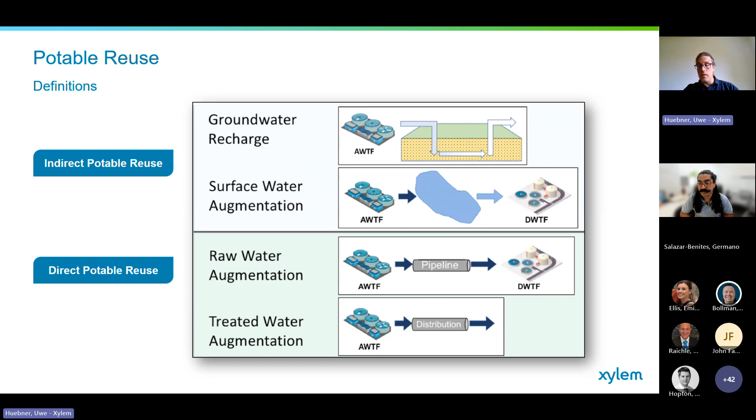The alternative option would be direct potable reuse, and that is where we would go directly after the advanced treatment, either into the drinking water treatment facility or even directly into the distribution system. So typically a part stream. And the main challenge here, of course, is that we don't have any response time anymore to really respond to failures and problems in direct potable reuse.

Okay, when it comes to potable reuse, of course, we need to make sure that we completely mitigate any health risk related to contaminants from the wastewater. And there are different frameworks how advanced treatment can be described. I like this from a presentation from the people from Trussell Technologies a while ago. They call it the 4 R's.

So the advanced treatment needs to be redundant. That means, first of all, we need to have redundant treatment regarding if a treatment is failing, that we still can supply the water. But it also means that especially for pathogens, we need redundant processes. So we don't want to rely on only one disinfection barrier, for example.

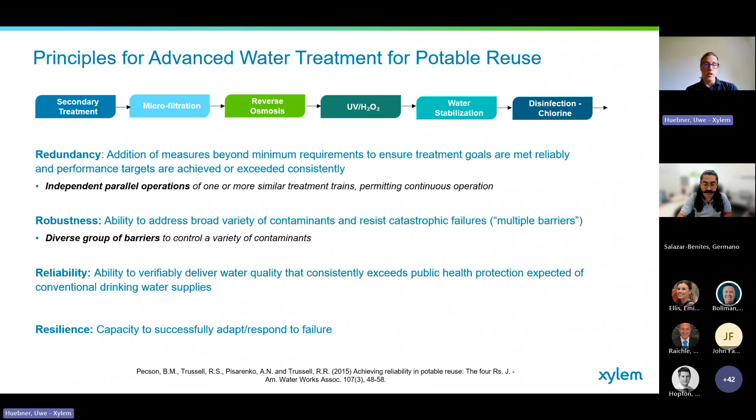The treatment needs to be robust, which especially refers to we want to have different types of barriers so that we can really address and control all different types of contaminants, especially chemicals. Of course, treatment needs to be reliable. So we're talking about potable reuse, acute health risk. So 24/7 treatment, and it all needs to work, of course, all the time. And the treatment train needs to be resilient to adapt, to respond to failures.

Okay, so with that said, there are a lot of different options how you can design a treatment train. In the recent past, there are two major concepts, I would say, that are dominating. And one is the RO-based concept. That's often also referred to as fully advanced treatment or the golden standard of California. So it's a membrane filtration followed by reverse osmosis, and then we have a final UV advanced oxidation step.

Alternative concepts are often referred to as carbon-based advanced treatment. We will hear more about this also from Germano today after my presentation. The major barrier here is ozone, followed by a biological activated carbon filtration, and then a GAC. This is often combined with additional treatment like UV disinfection or alternative barriers for some specific chemicals that are occurring.

So the carbon-based advanced treatment has the advantage that it comes at lower operational costs. And especially when we're talking about inland facilities, we don't have the brine, the concentrate produced from RO, which is a real management and treatment issue. But of course, apart from the better treatment, the more advanced treatment with the RO-based, we also have other potential advantages regarding the byproduct formation, which may be an issue with ozone, especially when we have high bromide levels. And of course, also, we often have higher salinity in our treated wastewater that we might even need a step to reduce the salinity.

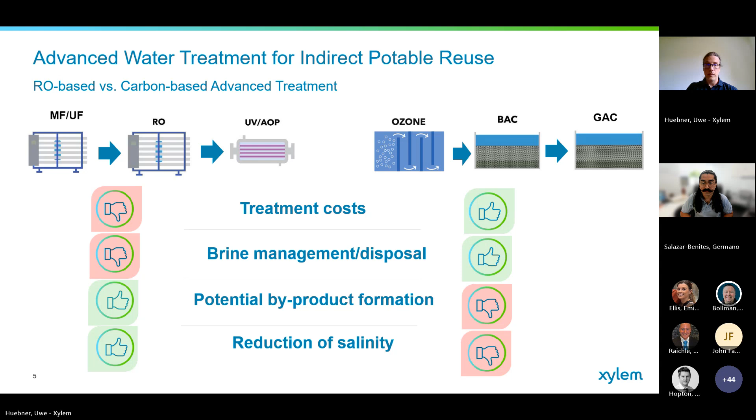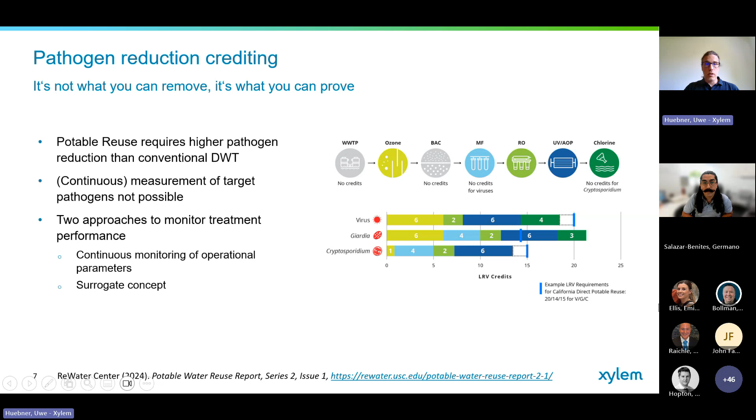And the other alternative is using surrogates. The surrogate parameter would be a parameter that is removed by the process, and that we can continuously measure to confirm the removal. Okay, I'm gonna go into 2 examples right now. Since I'm working for Wedeco Xylem, I'm focusing on UV-based and ozone-based treatment.

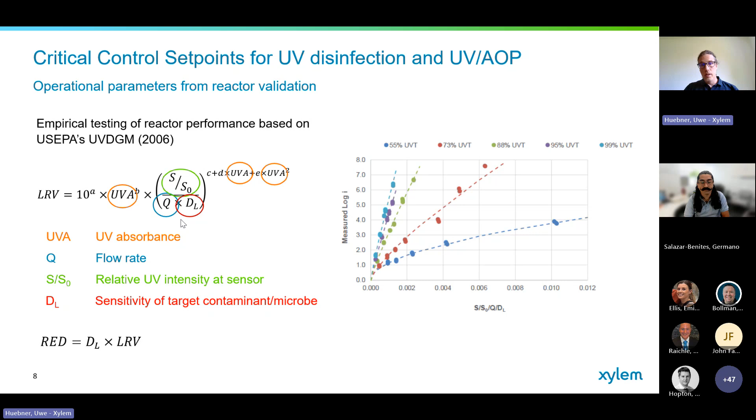For UV disinfection and also UV AOP, we're using validated reactors. What does it mean? We're doing a lot of testing at different conditions, and this testing gives us a reactor equation that describes the log removal value at every specific condition. You see here UV absorbance, the UV intensity we can measure in proximity to the lamp, the flow rate, and the sensitivity of the specific microbe. When we operate the system, we monitor exactly those parameters, flow rate, UV transmittance, UV intensity, to confirm that we all the time have the correct UV dose applied.

When we now want to do UV AOP, we can add additional critical control points for the performance of the oxidation. This would be, for example, correlated to the free chlorine in the reactor inlet. Sometimes we're also measuring residual free chlorine at the outlet for the UV chlorine process, as an example.

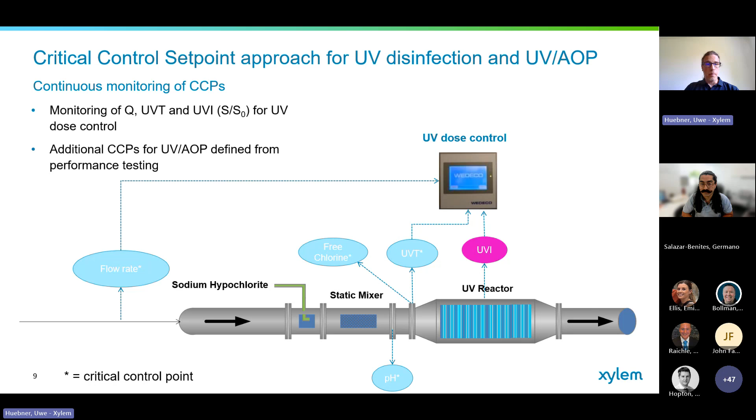Okay, let's briefly go into ozonation and ozone-based oxidation. I already mentioned the CT concept. That's the standard approach to confirm ozonation works well. We're measuring dissolved ozone in the outlet and integrating it over time, that would be the ozone exposure, or multiplying it with the time, which is a more conservative approach. That's the standard for drinking water treatment, and this correlates with the inactivation of pathogens.

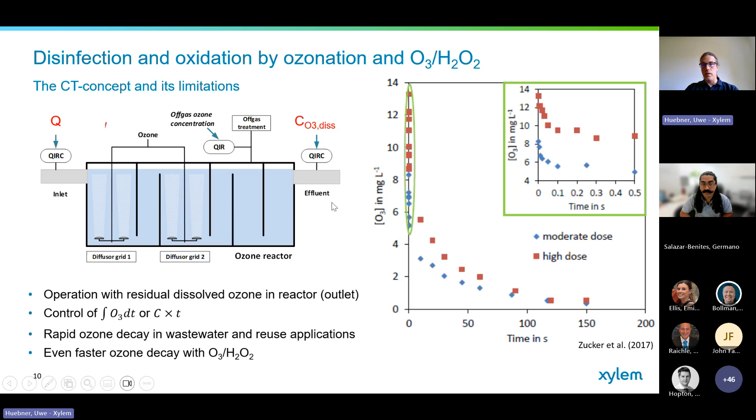However, when we look at the ozone decay in wastewater or in potable reuse applications, we often see this. Already within the first 20 seconds, the majority of the ozone has been removed, and often not much more ozone is needed for the treatment. With ozone peroxide, this would be even more extreme. We don't see any residual, so we cannot measure it. So what are we doing then? The approach here is to use surrogates to confirm the disinfection.

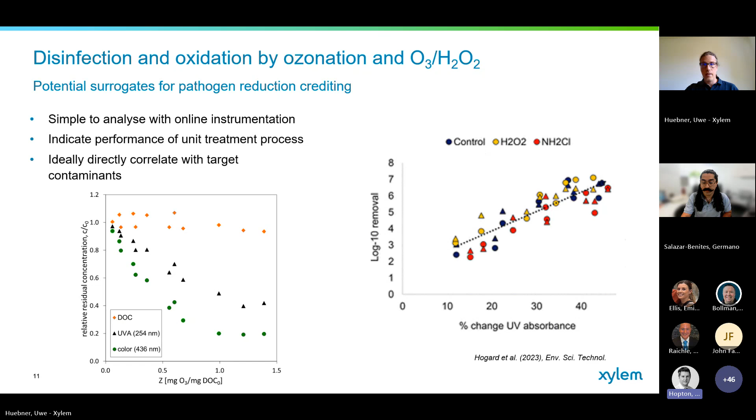All right, so I'm just going to jump into it. Hampton Roads Sanitation District is a wastewater utility, and we have been in operation since 1940. We serve a population of about 2 million Virginians, and we have a design capacity to treat about 850 megaliters per day, but on a daily basis we treat about 570 megaliters per day. We have 8 major wastewater treatment plants, and the idea is to build SWIFT only on some of them, which I'm going to indicate later on.

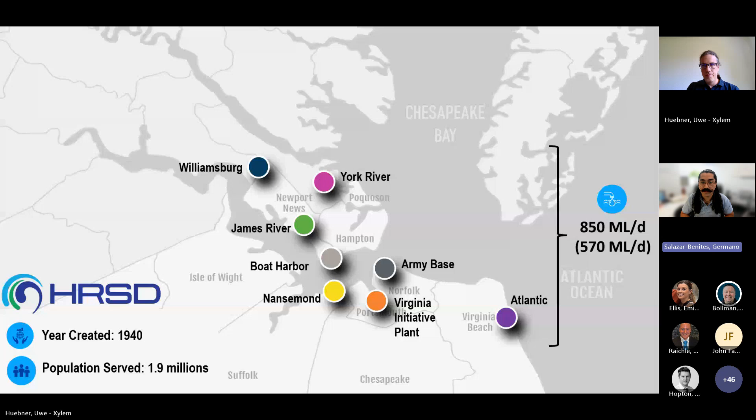Okay, so this is the current state of wastewater treatment in our region in Hampton Roads. There is a combination of drinking water plants that take about 80% of the surface water and about 20% of the groundwater. They treat it, they make it potable, then that water goes to the different houses and businesses. Once the water is used, that's the water that we receive in our facilities on the wastewater side.

Also, we're going to provide regulatory stability for the wastewater side. Every 5 years or so we get new permits, and we need to be able to meet those permits. So right now the dynamic is that we do research, try to find the technology to meet permit, implement it, and then meet permit. Then again we need to do research again, trying to do the same. But the idea of SWIFT is basically to plan to go all the way to drinking water standards, so the regulators can't ask for anything better than that. That's the whole idea.

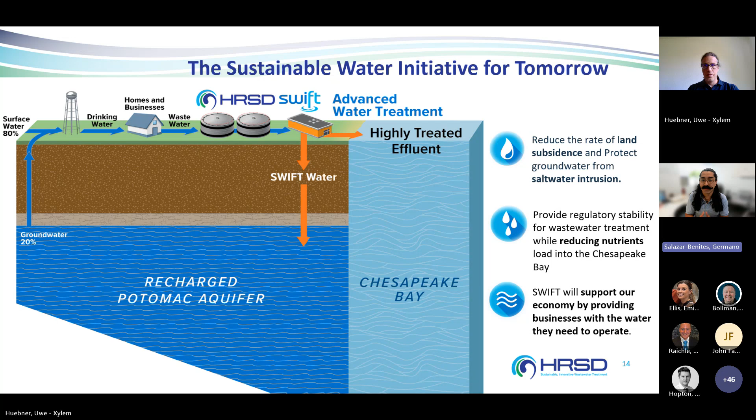All right, so like I mentioned before, from the 8 major wastewater treatment plants, the plan is to implement SWIFT on 3 of them. By 2030, which is only 4 years from now, we should be able to have 190 megaliters per day using SWIFT as the main technology.

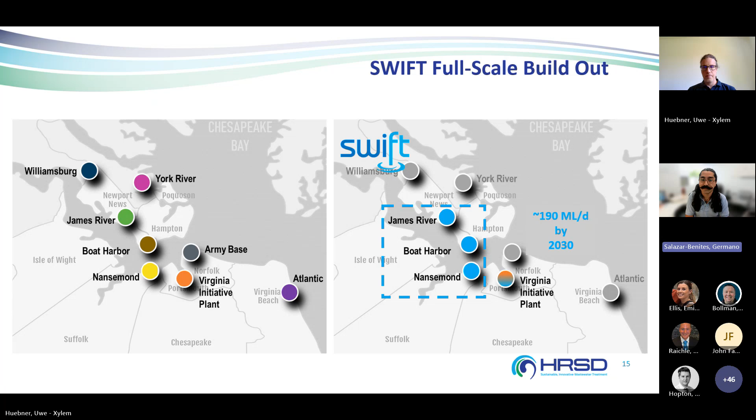Okay, so the talk today is going to mainly focus on our proposed regulatory limits and how we meet them, how we monitor and make sure that we're meeting these limits before putting the water into the ground. In regards to MCLs, the maximum contaminant levels, we have to meet all of them to be able to consider our water potable.

We have a limit of 5 milligrams per liter for total nitrogen. In regards to turbidity, it's very similar to drinking water standards, based on how much credit you want for LRVs, which I'm going to explain a bit better later. In regards to TOC, our limit is 4 milligrams per liter, which in comparison with California is higher—in California they have a limit of 0.5 milligrams per liter, but basically that's dictating what technology you should use. So in California, if you're going to implement reuse with a limit of 0.5, you have to use membranes.

If not, it's not really feasible to use carbon to meet those limits. But in our case, we're proposing to have a TOC limit of 4 milligrams per liter.

For total coliform, the bacteria, we're proposing something very similar to drinking water standards, like less than 2 CFU per 100 mils. Also, in regards of LRVs, we're proposing to achieve the 12-10-10 rule for virus, crypto, and giardia, and I'll explain later how we achieve this through the carbon-based train. E. coli also has to be non-detect.

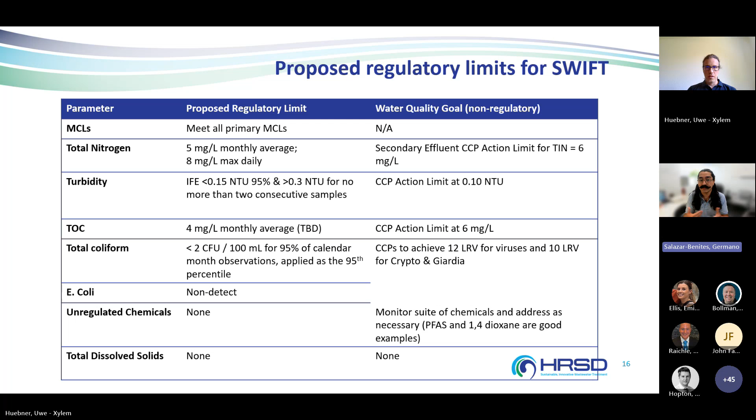You can go to the next one.

Okay, so this is our process flow diagram. I'm not going to explain this too much in detail, I have a summary at the very end so we can understand better what's happening on each train. But basically, we collect secondary effluent, which goes to the first step: rapid mix, flocculation, sedimentation.

Here we add two chemicals, aluminum chlorohydrate and polymer, and then we treat the water. The next step is ozonation. Here we add ozone, and we also add monochloramine, specifically to control bromate formation.

After ozonation, we add phosphoric acid, because sometimes the wastewater side does a great job removing phosphorus, and we want to make sure we don't limit that nutrient going into the biofilter, so we add a little bit. And because we add monochloramine to control bromate formation, we add sodium bisulfite just to quench that remaining chlorine.

We're feeding propane gas specifically to treat 1,4-dioxane biologically. I think we're one of the first water reuse projects implementing propane gas into the water. I'm not going to focus on this, but if you have any questions, you can follow up after the talk.

Then we have biofiltration, which is basically 1 foot of gravel, 1 foot of sand, and then 5 feet of carbon media on top. We do not replace this media, it's just a place for the biomass to live in.

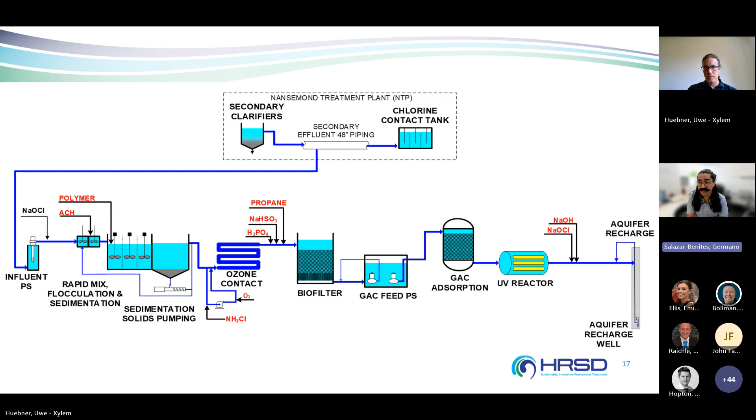After UV, we adjust the pH using sodium hydroxide, and then add a little bit of sodium hypochlorite just to make sure we have a little bit of chlorine residual, to avoid any bio-fouling on the screens at the well. By the way, this well is very deep, about 1,500 feet below ground.

You can go to the next one.

All right, so again, the main focus here is to show or demonstrate how we make sure the water is always safe. Our point of compliance is right before the water goes into the well, and we have different automation controls that make sure the water doesn't go into the aquifer if we're not meeting our regulatory limits.

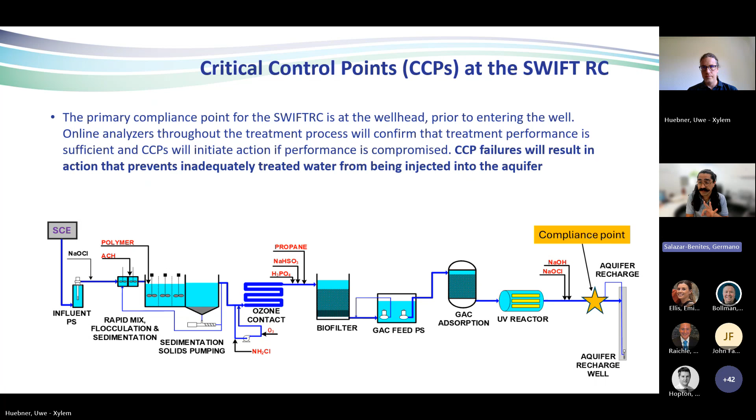So here, I'm going to explain that we have mainly 3 diversion points. Uwe, you can go to the next one.

The first diversion point is between ozonation and biofiltration. Basically, we just bypass biofiltration and treat the water all the way to ozonation. This happens, for example, if we believe bromate is higher, or if we lose the ozone feed for any reason, we will bypass biofiltration.

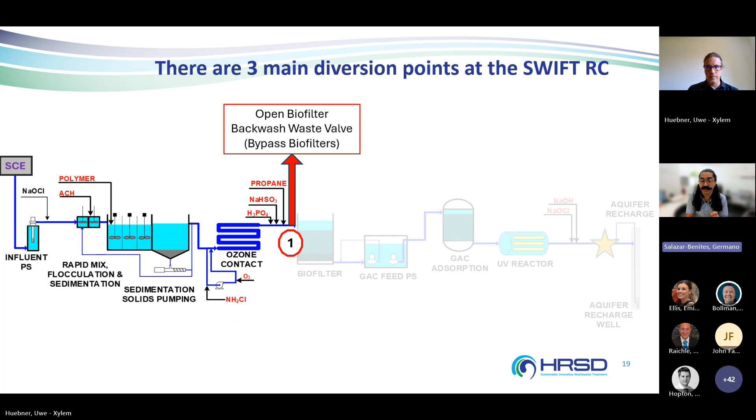Probably this is the most common one that we see. This is because if we have any upsets on the wastewater side, or we're not able to meet our regulatory limits, our desire is to always put biofilters in filter to waste. This is because in biofilters we have biomass and bacteria that we want to make sure are always happy and have enough food.

That's our third diversion point, just before the recharge well. Again, this is in case we do not meet our specifications in regards to water performance.

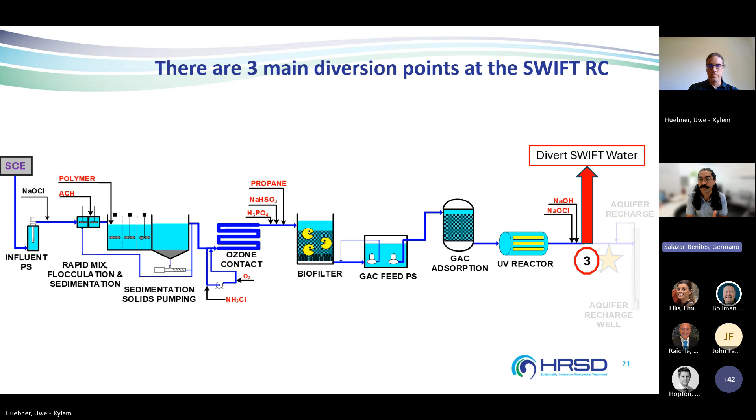Of course, to be able to have an automated system, we have to have a lot of different analyzers, and maintaining these analyzers is critical, very, very critical. We have a bunch of them before and after each process, trying to understand what is happening with the water as it moves and advances in the treatment process.

So we always need to make sure that we have a representative sample. Sometimes the analyzer is a long distance from the main process, and that's a problem. You need to make sure you always have a representative sample, and always verify and calibrate the analyzer as needed.

At the beginning, this was very new to us, so we didn't really know how reliable the analyzers were. So at the beginning, we were doing everything daily, and then as we were collecting data, we started to relax on some of them. Some we do daily checks, weekly checks, and some even monthly checks, depending on how reliable the analyzer is.

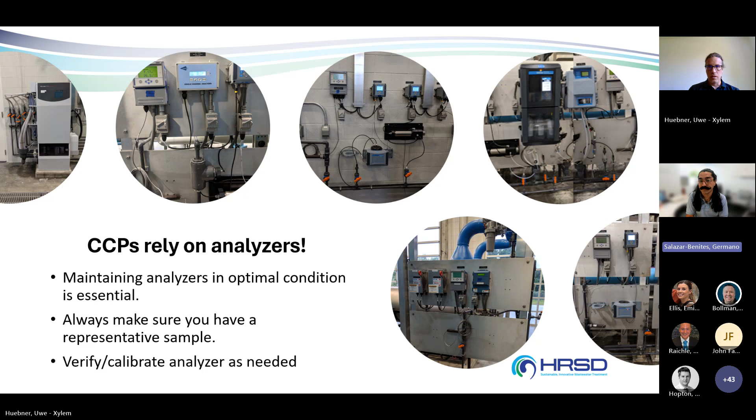Okay, so this is the main critical control points that we have for different reasons. Just to give you an example right away: the first one says influent pump station conductivity. We correlate conductivity with bromate concentration, to make sure that we do not form too much bromate.

So we have an alert value of 1400 microsiemens per centimeter. If this value gets close to 1400, it's going to start alerting the operator. But if this value goes higher than 1600 for more than 10 minutes, it's going to put all biofilters in filter to waste, and the water is not going to be processed anymore. The reason, in this case, is bromate. We have different actions and different time delays for different control points, just to make sure the water is safe. I'm going to talk more about how we achieve this specifically.

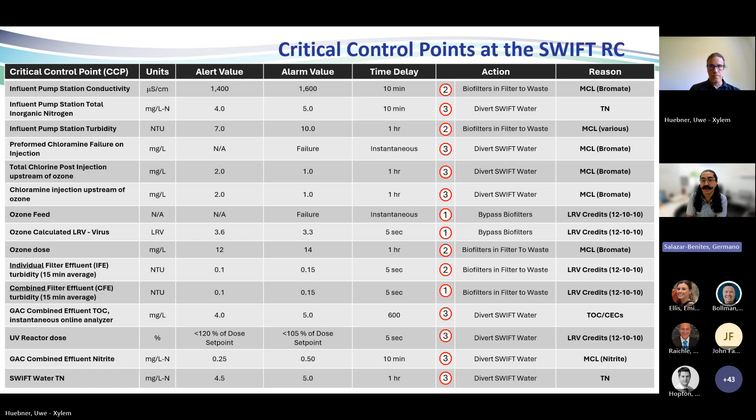Okay, so for bromate we have five different critical control points, and this is one MCL that we struggled with a lot, but now everything is under control, which is good. Like I mentioned before, we correlate bromate with conductivity, and if conductivity is high, that means bromate is also high, and we can potentially form bromate during the ozonation process.

So here on the graph, you can see that if the conductivity is higher than 1600, that's a potential for us to form bromate. Of course, it also depends on how much ozone you're dosing, but this is for us a limit, a safety factor, just to make sure that we do not produce any bromate.

Like I mentioned before, we use monochloramine to control bromate formation. Here on the graph on your right, you can see, for example, if we do not use any monochloramine, these are the blue points. At an applied ozone dose of 14 milligrams per liter, we can form up to 30 micrograms per liter of bromate, which is 3 times higher than the MCL. But if we use 3 milligrams per liter with the same applied ozone dose, the bromate gets better and is under control and way below the MCL.

So right now we have a critical control point that if, for any reason, the ozone demand is higher than 14 milligrams per liter, you can see it right here on the ozone dose table.

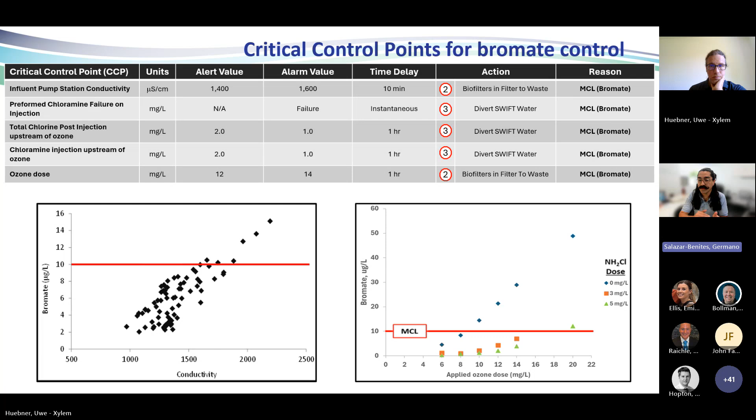If for any reason the applied dose is higher than 14 milligrams per liter, then we're not going to process the water all the way, and it's going to put the biofilters in filter to waste. Again, this is just to make sure the bromate doesn't go all the way to the aquifer. That's the main goal.

For LRVs, we have different ones, and our goal is to achieve the 12-10-10 rule, like Uwe mentioned before. So we need to achieve log removal values for viruses, which is 12, and then 10 for crypto and giardia. I'm going to talk about a specific one.

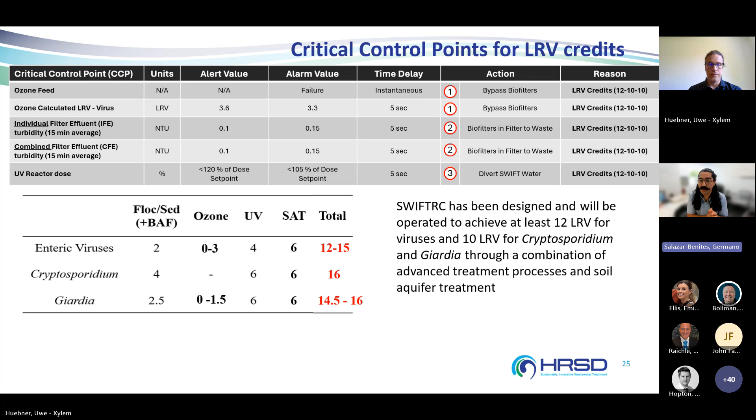For example, floc/sed works together with biofiltration, and this is based on the Surface Water Treatment Rule Guidance Manual from 1991, section 5.5.2. You can get up to 2 log removal values for viruses and 2.5 log removal for giardia if you keep the turbidity less than 0.3 NTU. You can also get 3 log removal for crypto if you keep the turbidity less than 0.3 NTU.

But if you want an additional 0.5 log credit for crypto, you need to make sure all the individual filter effluents are less than 0.15, specifically for each biofilter. That's why we have the CCP I'm highlighting here: individual filter effluent has to be less than 0.15, and if not, it's going to put the biofilter in filter to waste, or call for a backwash. Based on these rules, we can achieve 2 LRVs for viruses, 4 for crypto, and 2.5 for giardia.

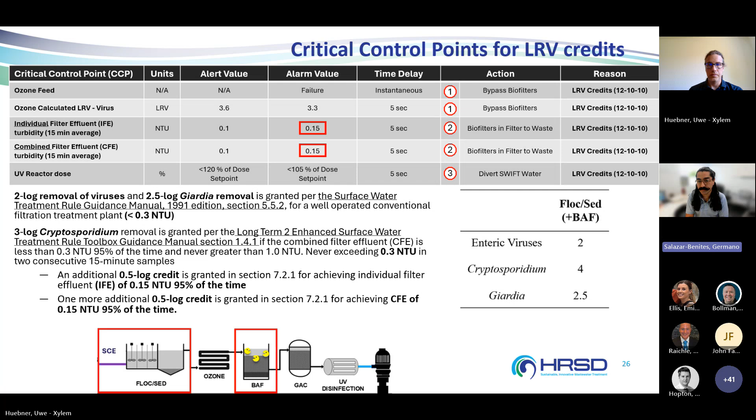For ozonation, we can also get some credits. This is based on the Long-Term 2 Enhanced Surface Water Treatment Rule Toolbox Guidance Manual, also based on drinking water standards. The way we operate our ozone system is based on LRVs, so this is our main set point. We need to make sure we're always higher than 3, to be able to meet the 12-10-10 across the whole process.

If the ozone feed fails, that's very bad, and it's going to bypass the biofilters. If the ozone LRV is approaching 3.3, our set point is 4.5, just to be always very conservative. But if it approaches 3.3, just because the ozone demand is super high, it's going to start alerting the operator first, and then take action if it drops below 3.3 for more than 5 seconds, so this is super quick.

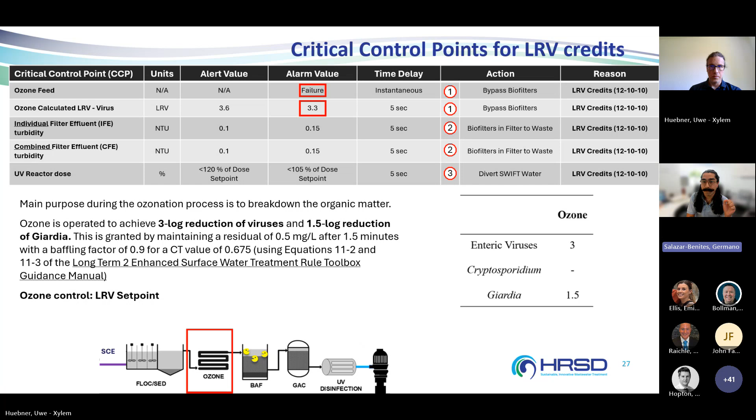This is based on guidance you can find in the Long-Term 2 Enhanced Surface Water Treatment Rule Toolbox, and it's based on CTs, temperatures, and flow. So we're monitoring that very closely in our system.

For UV, similar to what Uwe was mentioning earlier, it's also based on equations. When we requested to have a UV system here, it was designed to achieve 4 LRV for viruses specifically. To do that, we need to meet a design dose of 186 millijoules per square centimeter. As long as the dose is higher than 186, we can make sure we're always getting 4 LRV for viruses, and we can also get 6 for crypto and 6 for giardia.

The critical control point here is, to be conservative, if for any reason the UV dose drops below 195 for more than 5 seconds, we're going to divert SWIFT, and not put the water into the ground. Again, this is based on CT, flow, and everything else.

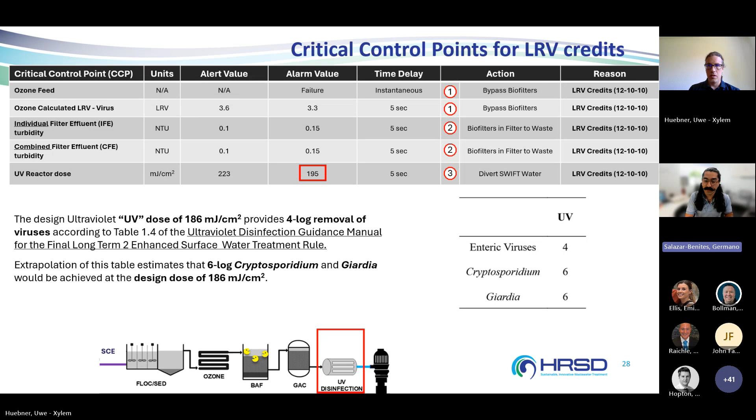All right, so if you were paying attention and if you are good in math, you'll notice that I was lying to you, and I'm not achieving the 12-10-10 as I was promising. So we're actually achieving 9-10-10. For tasting specifically, if we want to give people the opportunity to taste the water when we do tours in here, we have a separate system that can achieve 4 LRVs for viruses just using chlorine.

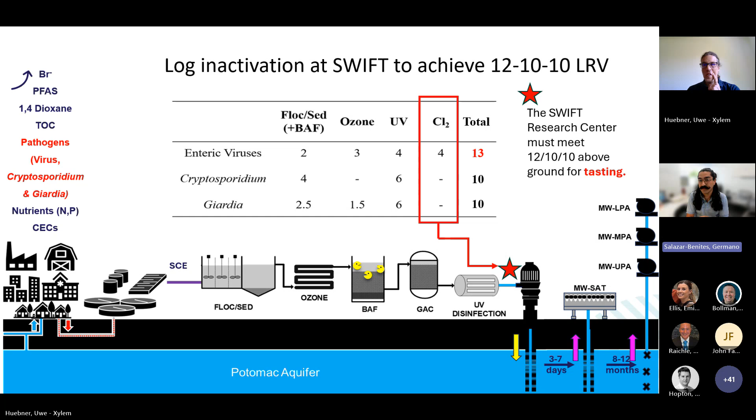That's the way we achieve the 12-10-10 rule above ground. And I'm mentioning above ground because we can also get credits once we put the water into the ground. So we can get credits by SAT, soil aquifer treatment. Once we put the water into the ground, it's still going to be treated naturally. Based on California rules, for 1 log we can get up to 1 log for 1 month of travel time, and we can get up to 6 log removal reductions, so basically 6 months of travel time. For full-scale operations, we're going to be relying on SAT to achieve the 12-10-10 rule, and that's been granted to us.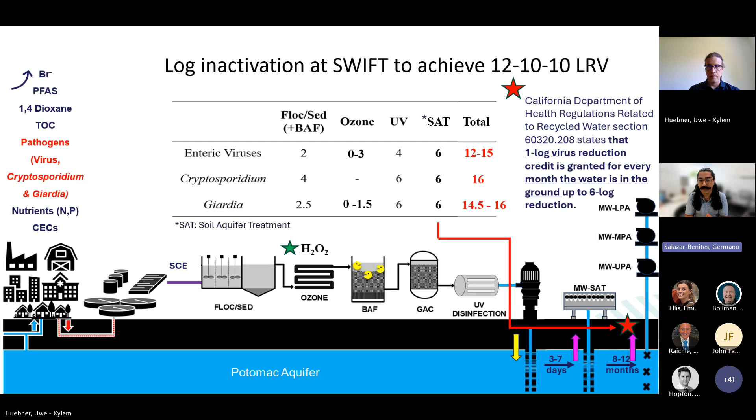So for ozonation at full scale, we're not going to be using monochloramine, but we're going to be using hydrogen peroxide, which is better for oxidation of specific contaminants. But we won't be able to measure any ozone residual, so we won't be able to achieve any disinfection credits or LRVs. That's the bad thing about it. In the current guidelines for drinking water, you're not able to get any LRV credits if you don't have ozone residual. That's not a problem for us because, again, we can rely on SAT to achieve the 12-10-10 rule. We know that even without an ozone residual, we can still remove some viruses, and that's what we're trying to change here—the rule for LRV credits here in the United States. That's something we're working on right now.

So I mentioned the TOC has to be less than 4, and by doing that we're also controlling a lot of different contaminants of emerging concern. What I'm putting here is a barcode you can scan to see all of our quarterly reports. Those are open to the public, and you can see all the data we've had since May 2018. Every quarter we've been providing this data, and you can see everything. This is just a snapshot, not everything, but you can see the average and the minimum report level for everything we're doing—different microorganisms, disinfection byproducts. You can see different tables, like inorganic chemicals and organic chemicals, and how that correlates with the TOC of 4 milligrams per liter.

So if you're wondering whether we're measuring for PFAS or anything else, yes we are, and all the data is right here, showing how this correlates with TOC. Of course, TOC here is going to vary because of how we operate—we have 2 GAC vessels, and when the TOC approaches 4, that's when we replace the GAC. So sometimes you'll see in these reports that the TOC is very low, meaning the GAC was just replaced, and when the TOC is high, that means it's getting close to replacement. Just keep that in mind if you start looking at this data. There's more data if you keep going.

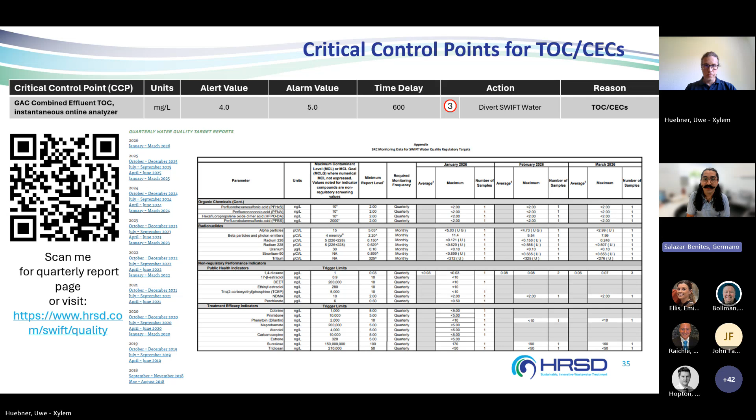This is just a summary of our main treatment process. Basically there's a lot coming into our collection system, like bromide, PFAS, 1,4-dioxane, total organics, pathogens, nutrients, and contaminants of emerging concern. The wastewater side mainly focuses on removing nutrients like nitrogen and phosphorus. The TOC coming into SWIFT is about 10 to 12 milligrams per liter. I'm not going to explain this in detail because of time, but you can see exactly what's happening in each specific process.

So yes, I guess one thing that I want to highlight here is that for full scale operations, we're going to implement ion exchange, and this is specifically to remove PFAS, so PFOA. Right now, GAC is our main barrier for PFAS, but we don't want to rely on GAC to remove PFAS specifically, because that's going to basically decrease the bed volumes or how much time we can run it.

Just to give you an example, if we focus on TOC, GAC can run up to 40,000 bed volumes. But if we focus on PFOA specifically, we can only run up to 20,000 bed volumes. So right now we're replacing the carbon more often just to be able to deal with that PFOA. But for the future, we're planning on implementing ion exchange. So GAC can focus on TOC, ion exchange can focus on PFOA, and then everybody's happy.

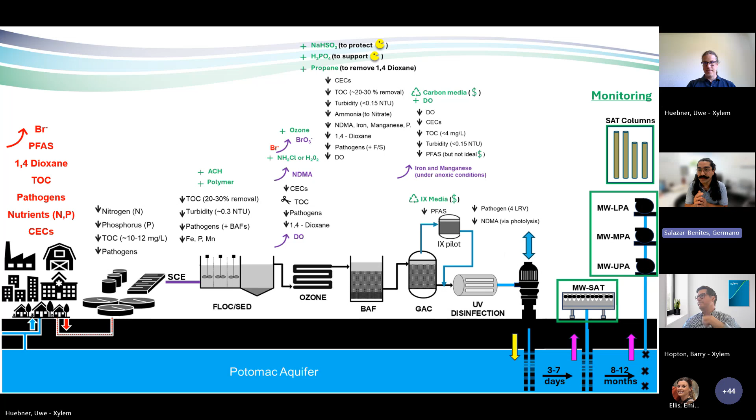Today's sessions really highlighted both the opportunities and the complexities around advanced treatments and potable reuse, particularly indirect potable reuse. As the industry looks to improve resilience, sustainability, and long-term water scarcity, I think it's really important we start addressing these and sharing these lessons from around the world. So hopefully today was a really good start in that process from Xylem.